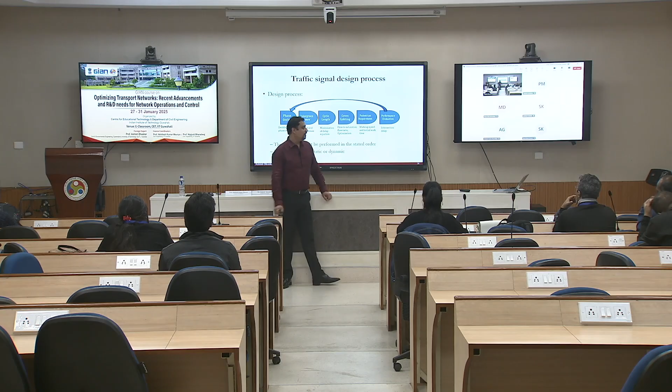Okay, so maybe what we should do is think of a hypothetical, ideal scenario. You have the data you need for the signal. You don't have side friction unnecessarily, so you're able to enforce things so that you don't have too much—like a rickshaw stopping at the intersection itself. You're able to clear that and have less side friction.

But obviously you cannot totally remove the heterogeneity out of it—you will have cars, bikes, and e-rickshaws there. So what I'm going to discuss now until the end of the first lecture: afterwards we will discuss under that hypothetical scenario what learnings we can get from overseas that can be applied, or what areas we should focus on as a researcher or practitioner if we have to adopt and implement that in Indian conditions. We can think of some imaginary scenario—but is it possible, if we're able to get rid of those issues through enforcement, can we still do something? So that's what we'll discuss now. Please keep this in mind.

I didn't plan for this, but since things didn't start out as expected, let me ask a question. Yesterday we started the discussion on traffic signals, and honestly I struggled to figure out what to present and what not to present. With VSL and ramp metering it was much easier because I know it's not taught in Indian conditions and you don't have much experience with that, so I went to the fundamentals, especially the fundamental diagram. With respect to signals, I know in the undergrad program you're taught how to design the signal, but I wanted to figure out what I could cover from the Australian experience to bring to the table so we can initiate this kind of discussion.

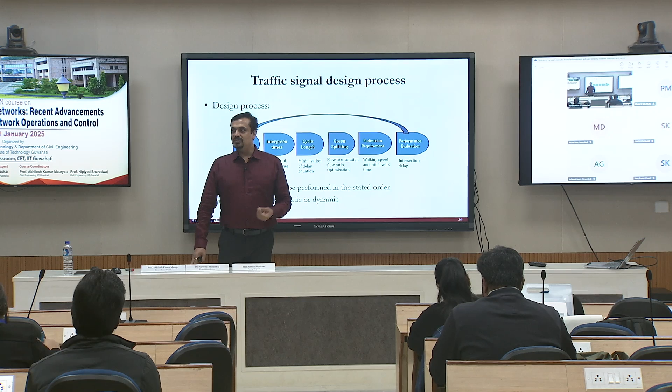That's the objective. We talked about the design process—there's one process where you talk about design, signal phases, maybe defining phases, and intergreen time: how much time you need for the transition from one phase to another, given the width of the road, the width or length of the vehicle, etc. We talked about cycle time—you can borrow an optimization equation from Webster or other means to get the cycle time you want. Also, specifications defined by your jurisdiction, like the Indian Standard Code, also have some specifications, with improvements made down the line. So each jurisdiction has its own requirements that an engineer must satisfy when designing a signal for that area. Then we talk about green splitting.

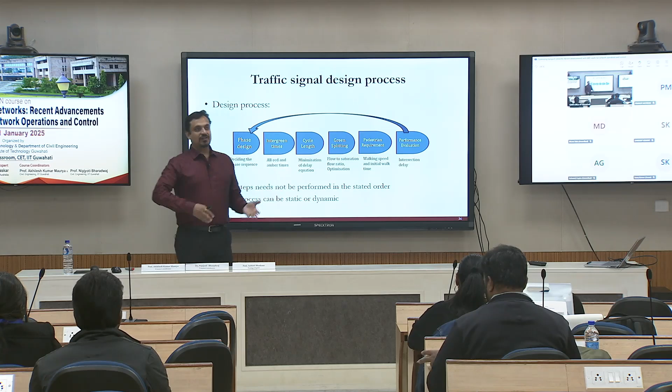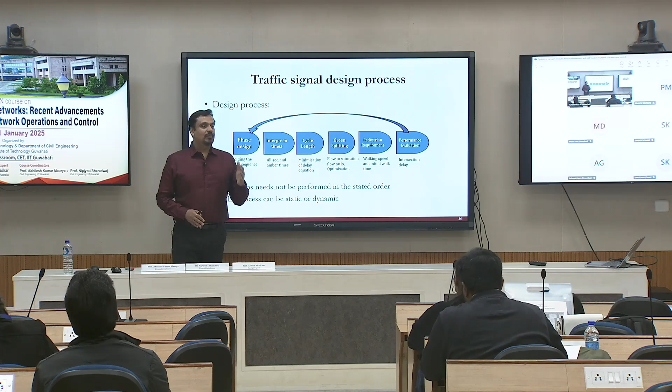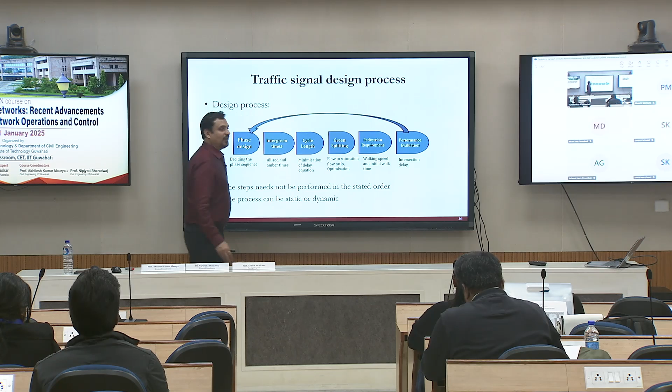A very simple approach: give green to the approach where you have more demand. You define the entire cycle, say pie, and the share of pie should go higher to the approach where there is more demand, with certain restrictions—you want some minimum green to serve pedestrians. Although I did not discuss pedestrians, each time you give an approach a green, a pedestrian minimum is specified as well. Then we talked about—we didn't discuss much—performance evaluation, but you evaluate the performance once you've designed the signal and keep fine-tuning it. That was the process we discussed yesterday.

Now today I am going to talk about phases, the first process. The phase, as you know, you have different movements. Basically you try to combine certain movements together to give the right of way to enter the intersection. That's what the phase is.

Signal phase is generally defined as the right of way in a cycle that is assigned to an independent traffic movement or combination of traffic movements. This must account for the lane use and the traffic volume as well as the opposite traffic volume. So basically safety plays an important role when you are designing the phase.

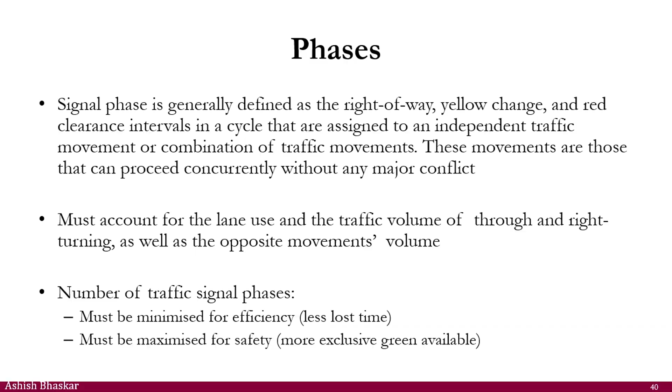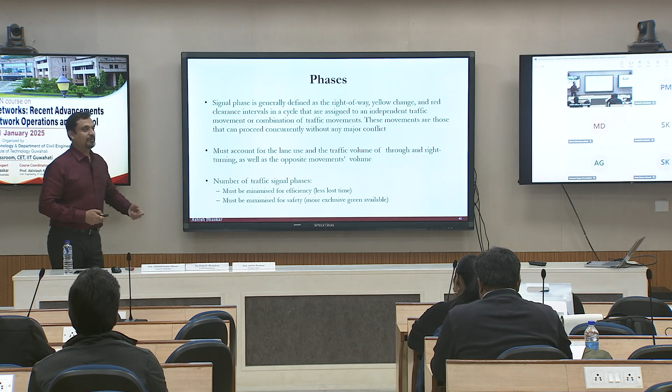We have also seen you do not want too many phases, because too many phases contribute to lost time, and that's not optimal. Also, you cannot have too few phases, then you will have an overlap happening, movements which can have an accident. So you want to avoid too much overlap from a safety perspective. There is a balance between efficiency and safety, and you as an engineer have to make a decision for that corridor.

There are different ways of defining the phases. Phase-based approach or stage-based approach is what I was discussing, that is one way of doing it. The other way is ring and barrier control. The third one is group-based control or movement-based control. It all depends on which country you are in and what they have followed.

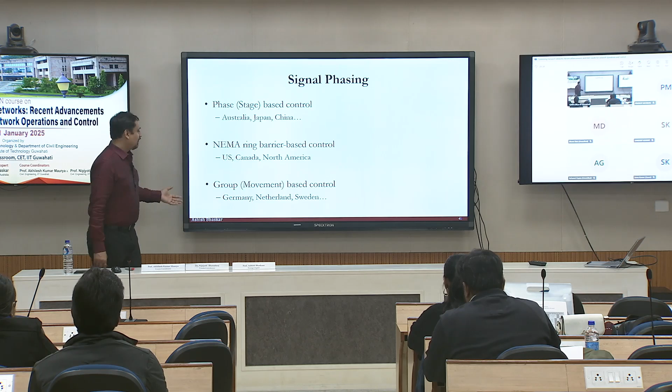US, Canada, North America follow the ring and barrier approach. Australia, Japan, China, UK, and I believe also India, we are following the phase-based control. Whereas if you go more to the European countries, they are following more of a group-based or movement-based control.

How many of you are aware of these three, the differences between them? Okay, so we'll discuss about what these three are. The first one we have already discussed.

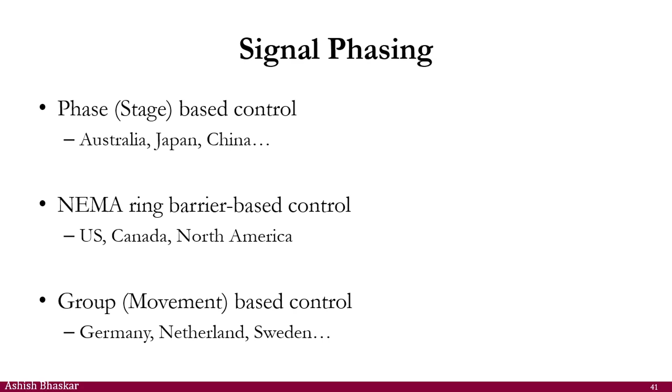We already talked about the first one yesterday, that you have an intersection and you define the phases. I have defined 4 phases. We can have 3, 2, whatever you want to specify. That depends on the geometry of the intersection, the demand profiles, and the past incident records on that intersection. That was straightforward, and at the end of the day, you might be displaying the green attached to the phase.

In the other case also, whether you go for the NEMA ring barrier or a group-based approach, you will have a display phase sequence. So let me talk about the NEMA ring barrier.

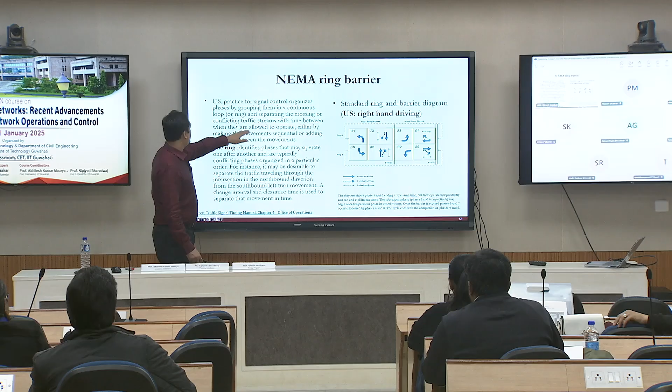This is from the US, so right hand driving is there, please keep that in mind, it's different from the way we drive here. In the US practice, they organize the phases by grouping them in a continuous loop, or a ring. So in this case you have 2 rings, the top ring and the bottom ring, think of them as 2 separate rings. They are separated by crossing or conflicting traffic streams, with time between when they are allowed to operate, either by making the movements sequential or adding a barrier between the movements.

So I have phase 1, phase 2, phase 3, phase 4. These phases you have to specify as an engineer, you will specify which phases you want. But if you look at a specific ring, the top one, none of these can go together. I will not let my left turner go with the other phase's left turner. They are right hand driving, so you might not be able to imagine it, but it's the same as our right turner going with the other movement's right turner, for example. So this is what you specify for the top one.

Then you have a barrier in between. What this barrier is saying is that these ones should never combine with the other ones. So let's say the left portion of my top ring should never combine with the right portion of the bottom ring, and vice versa. That's why you put a barrier here. Are you okay with this, ring and barrier?

But you can have a combination: 1 and 5 can be a combo, 1 and 6 can be a combo, 2 and 5 can be a combo, 2 and 6 can be a combo.

That's what the ring barrier is all about. It gives you more flexibility. In the previous case, once I have defined the phase, I don't have much flexibility. If I am defining the phase like this, we can adjust that also - we'll discuss that later. But here the phases are fixed, so in this case you're adding a bit more flexibility in the way you're operating.

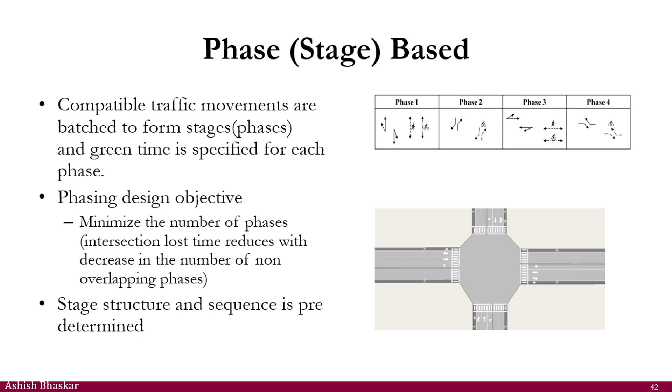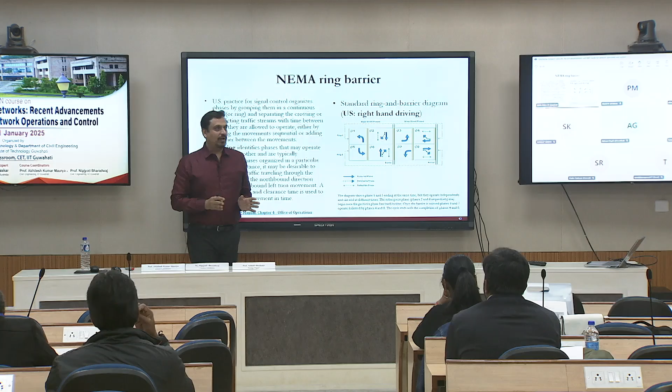In this case, you can see there are some protected phases and permissive phases. Protected means, if I'm taking a right turn, and I have a right signal, it means that is my priority to go - I can take a right turn. But if I do not have a right turn arrow and it is not red, just green for through, it means I can take a right turn provided the guy coming from the other side gives sufficient gap to make the turn. This is called a permissive phase.

So permissive phase is like, there is a through and a right movement. If this right movement is permissive, it means it will enter only when the other approach has sufficient gap for you to enter. So you're allowed to take a right turn provided there is sufficient gap in the other direction. You are allowing a somewhat risky behavior, because a right turn crossing a through movement can cause an accident. You allow that behavior because there isn't too much demand on the other approach, so there will be a safe gap for them to move.

So you can allow that. Basically, it's not that you will never allow a right turn across a through movement - you can allow it provided there is sufficient gap for it to be possible. If it's not possible, you won't do it - then you make it a protected phase. You understand the difference?

In fact, when you have no signals and you're trying to turn right, you're always in the permissive phase. In a case like India, you maybe believe you are always in the protected phase. But I hope you understand.

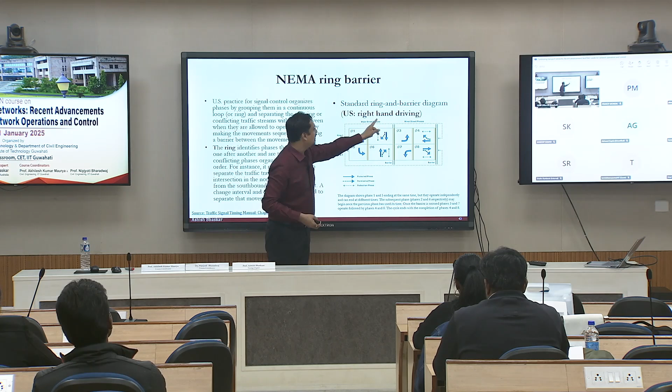So basically, the dotted line means this guy - since this is right-hand driving - is allowed to take a right turn provided there is a gap in this approach. Similarly, this guy is allowed to take a right turn provided there is a gap in that one.

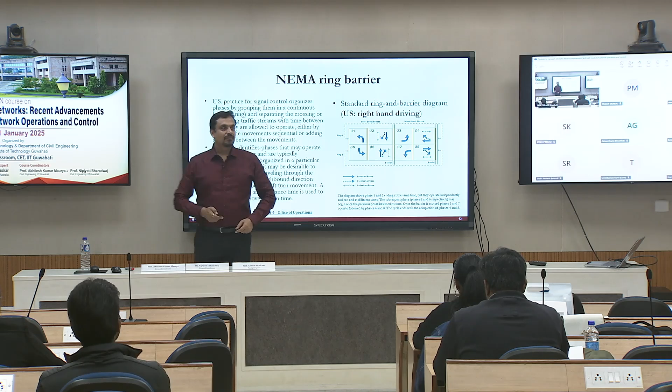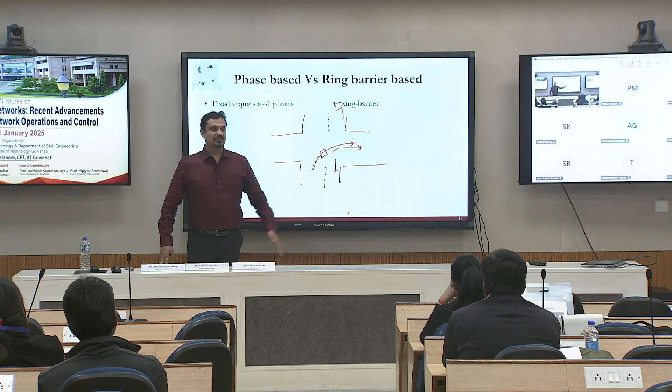Some other time of the day when you have high demand, you will not allow that. It's a decision you make as an engineer about that site, based on the demand profile. You need to understand the intersection geometry and the demand profile. Sometimes the intersection is too small, and you say no, it's unsafe, I can't allow that. There's a lot of engineering judgment applied. It's not one approach that can be applied blindly on all intersections, because almost all intersections are unique. You don't have the same intersection profile even in the same city.

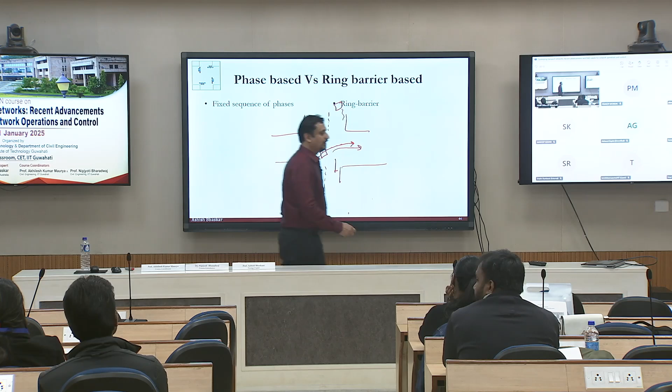I should rub this actually.

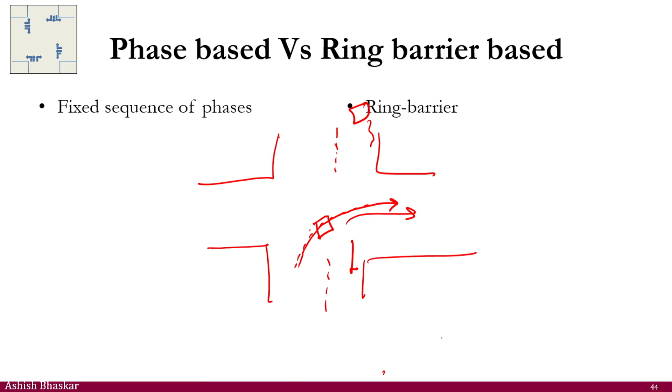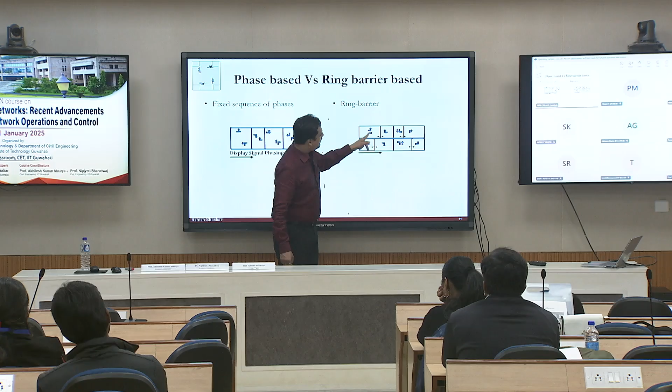Now let me show how ring and barrier gives you the benefit, more flexibility. Imagine this is a fixed phase sequence. Ring and barrier is, this portion is a barrier, and these can move. So let's say this is phase 1, phase 2, phase 3, phase 4, 5, 6, 7, 8. I give phase 1 that much green, but I can give this phase less green, and start the other phase. If I do that way, this is the combination I'm getting - this is my display signal phasing, meaning what you're putting on your signal lanterns. Or I can do the other way around, shift things, and get another combination. So you can have different combinations possible - that's the benefit.

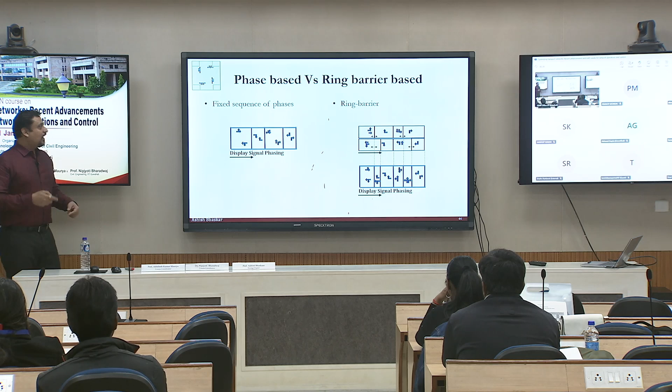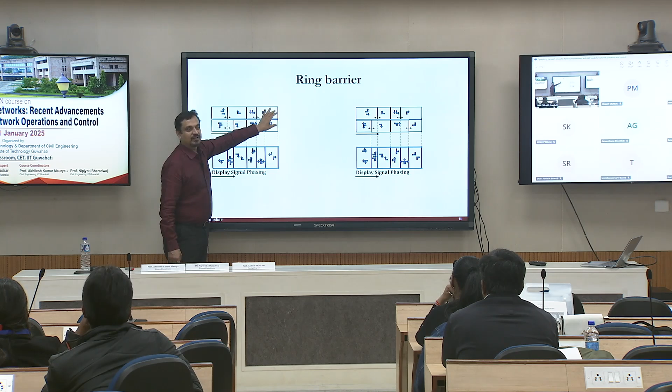Ring and barrier has slightly additional degree of freedom compared to the phase-based one. Let's say these are two conditions - one kind of display, there's another display. So here you have a through and left, and here you have a left and through, then you started your right phase, and then the combination of that one. But this was a barrier - this will never collaborate with that one. There's a solid barrier in between, and then you have this combination. So you start with these two phases in the beginning, but the duration depends on whatever demand is there. You end with those two phases, the cycle finishes, and you start again. That's a ring and barrier approach.

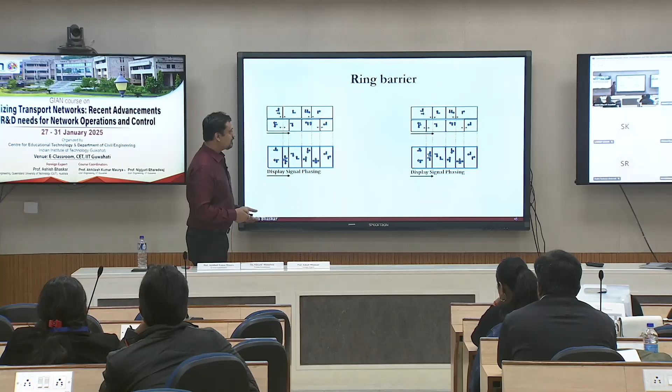It all depends on the controller you are using. NEMA controllers are designed that way, and this is how you design the phases for that condition.

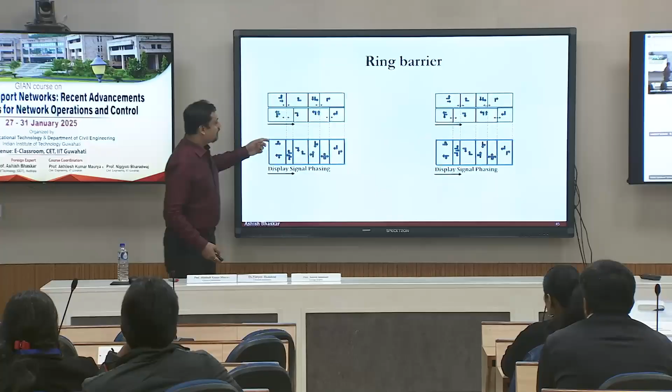Jump between the two means - what you're saying is, for example, in the first cycle I start here, I'm also starting there. Think of this as time - as time is moving, you use one combination from here, another from there, or one phase from here, another there. So I start with phase 1, I'm also starting phase 5. Let's say there's not much demand for phase 1, I can cut phase 1 early, then go to phase 2, but I can still continue phase 5 until I reach my barrier. The beauty is these two rings can work independent of each other, and that independence gives you that combination.

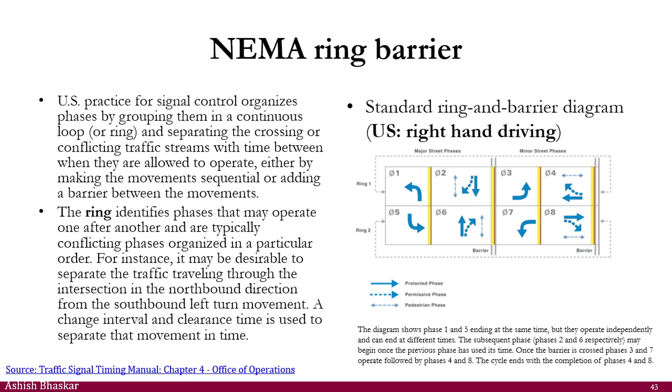Does number 2 and 5 have a conflict? No - in fact 2 and 5 doesn't have any conflict, because think of 2 as turning right, this one turning through, and this is the left turn of 2. So if you have 2 and 5 together, it means you are giving all three movements of that one to go.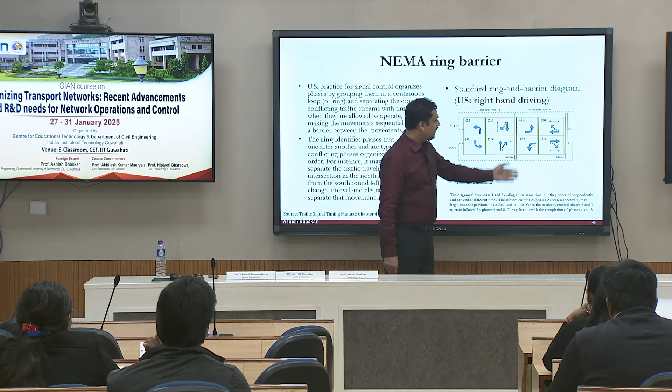You design it. In this example, they have used a permissive phase. You say, no, I don't want a permissive, I want a protected and I want a separate permissive. That's another phase you are specifying. So at the end of the day, you have to define the combination of the movements that defines the phase.

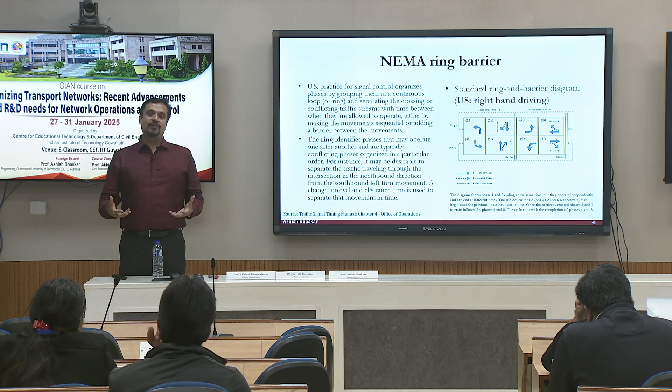So that is depending upon the number of lanes also, the demand. Because this one is designed for an intersection, for that intersection you have to understand the geometry first. What's the geometry of the intersection? Then what is the traffic composition for that one? Then for that traffic composition, you define what should be the phase sequence and all those things.

So that was for the ring and barrier. I borrowed this from one of the Eclipse slides from Sidra Solutions. Signal phasing sequence, when you're doing a phase based approach, you can combine different phases.

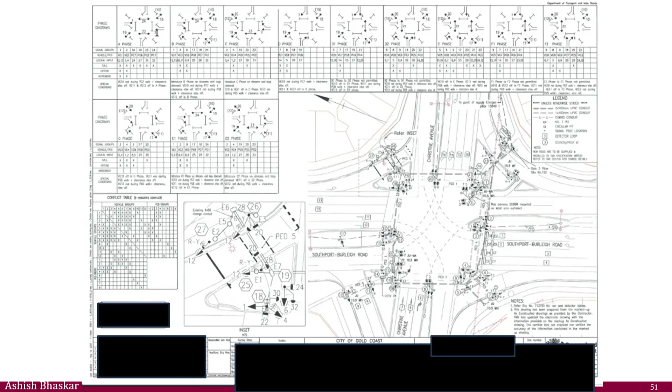That was for the phase group. Now I'm going to talk about a further degree of flexibility, which is the group based or movement based controller. There I don't care about phases. What I care about is, give me - I can group my movements together. Ultimately what you're doing is, in the previous case also, you might have grouped your movements to form a phase. I said, let the movement be whatever, let this be one movement, let that be another movement, let this one will be the third one. Let's have the movements like this, let's have them in the bag. Based on my need, I will just extract some of them and let them go. That's what this group base is doing.

But in this particular case, you have an intergreen matrix. So intergreen matrix says that if I am having a group K1, I'm finishing K1, I can start K2, but K3 should start 4 seconds after that. There should be a 4-second intergreen between K1 and K3. And in fact, we talked about the green time and all that - this is the one which is considering that. You have to design it for that intersection based on your geometry of the intersection, based on the speed limit of the road, based on the pedestrian speed and all those things. So that has to be designed for the intersection. So this is a lot of degree of freedom.

Why do we need that? When do we need that?

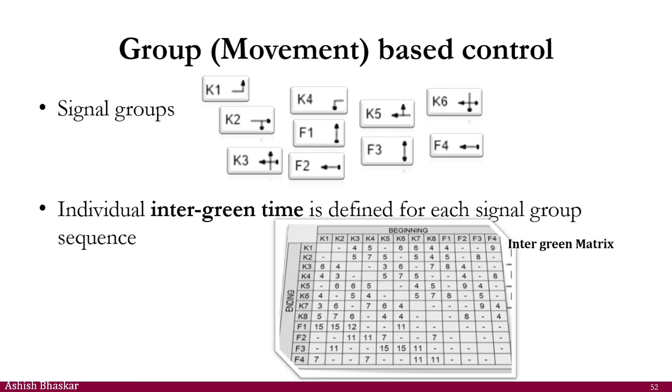But vehicles will arrive, whatever form they arrive in. If there is equal traffic in all approaches, this thing will end up same as the phase group, a very fixed phase group. See, if the traffic is equally coming from all the approaches, ultimately the optimal combination that you get from here will be similar to the phases that have been optimized, right? So yes, you might be picking them from a pool, but the optimal pool will be same as the optimal phase you have defined. It will not be a very big difference.

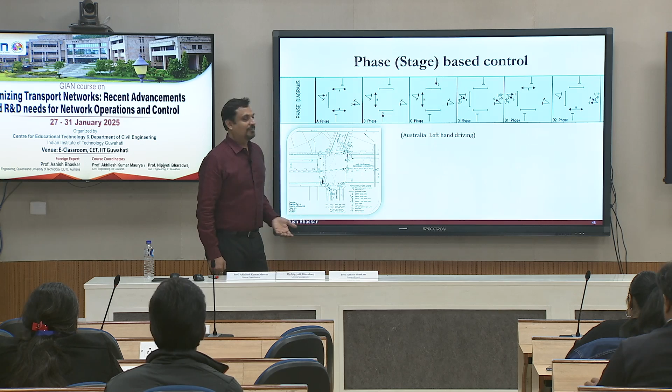In the previous cases we talked about flexibility. I started with the very fixed base approach, that's a fixed one. NEMA ring and barrier adds a layer of flexibility, but you still have to define these phases. You can have a different ring specified based on the requirement of the intersection, so you have an additional level of flexibility. The phase-based approach adds that flexibility too, but this one is saying I have a totally different level of flexibility. I am giving you full flexibility here.

We were making use of the time factor to design it. They do that based on what situation is required. What situation is this going to really add a benefit? When we have real time sensors. For the other ones also we need real time sensors? The fixed time control, when you do not make any dynamic changes, you don't need real time sensors.

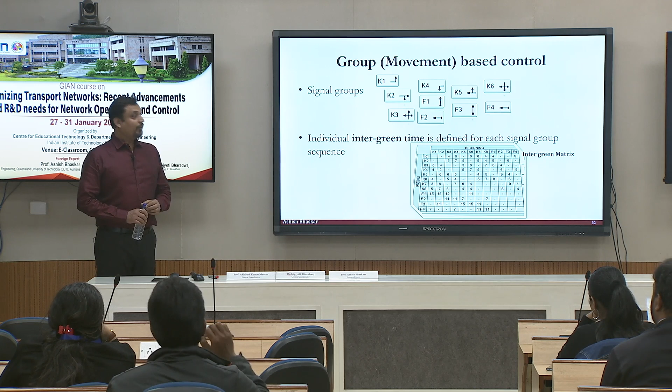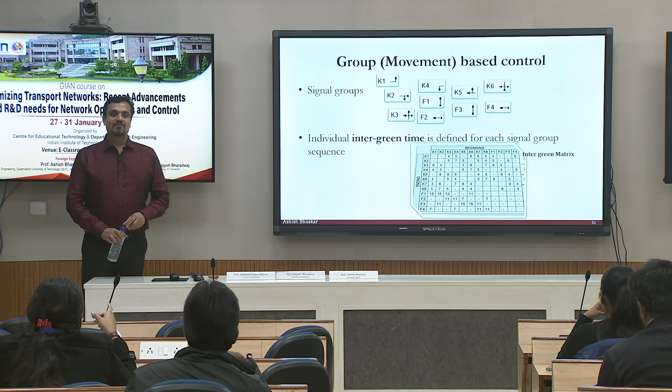But let's say all of them have real time sensors. This group-based control has been implemented, yes, it's in Europe. This is for intersections only, yes, all of them are intersections. I'm totally talking about intersections only. When we know that there will be fixed volume on fixed routes, we can do this. Yes, we can. But we can do the same for the other ones also.

Variability is so dynamic. Yes, when you have such dynamic variability, this is going to really make some benefit. I said this is in Europe. What's in Europe that is different from India or other places? Borders are open. Think of any Indian song, they are dancing in Switzerland, and you have trams and metros, all things going around. It's a multimodal situation, so much happening there. The benefit is when you have so many different combinations happening, a tram is coming, you want to give it priority, it becomes much easier to handle that way.

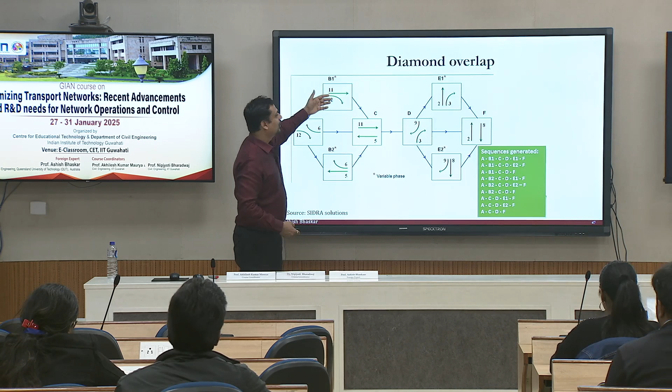This is a time when you need more flexibility. This is my personal view. You have the benefit literally when you have too many constraints. If you do not have that much constraint, the demand is equal from all the approaches, whether you use this approach or that approach, more or less all of them will be giving the same thing. There will not be a significant difference. The benefit is only here.

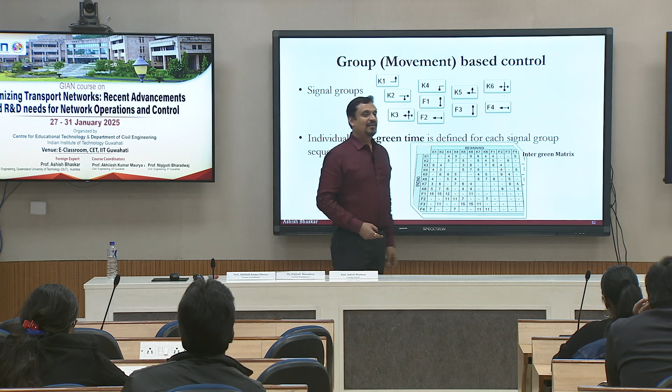The example that you're putting is still at the intersection. Intersection, yes, the tram, these are intersections. So you say, like, I've been in Europe, I can also see an intersection with bicycles, trams. Once you are implementing it, irrespective of whether you have bicycles or trams or not, you have the cars, you are implementing it, right? But I'm talking about when do you think will be the major benefit? Major benefit will be when you have variability in the demand coming from various approaches.

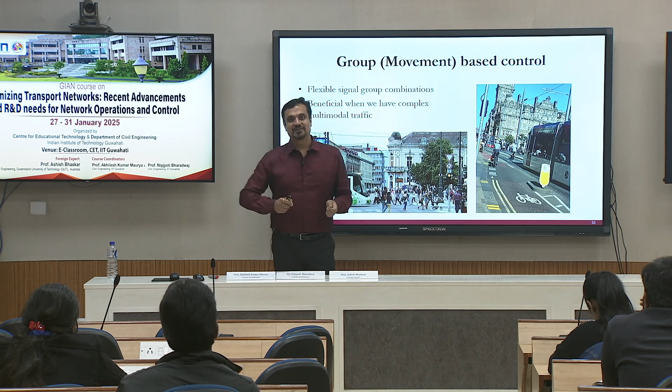Stochasticity is far higher. If you have fixed things, they will follow a certain order, and you will have some lost time. Here you don't follow any order, but it's at a certain cost. What is that cost? You don't follow any order, so what will happen? You will just select whatever is the highest demand, you think you will select it.

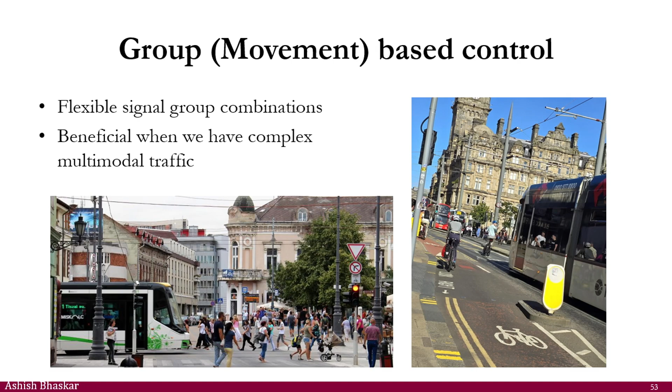In fact, in this case, the lost time is less because the way you select them, you are overlapping as much as possible. When you are overlapping, I will give you an example, then you will have understanding. One of my PhD students is working on this topic. Initially I was thinking not to talk about it, but yesterday I did a lot of massaging on my slides to figure out what to present, what not to present. So I will just give you one example, give me one second.

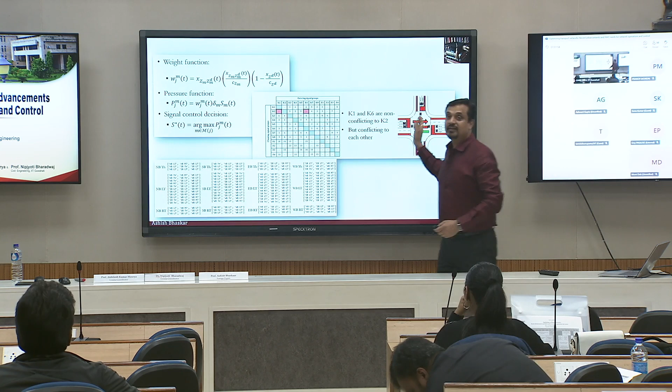This is an example from one of my PhD students' work. He is working on a traffic signal control algorithm based on the max pressure algorithm.

This idea is borrowed from internet communication concepts. Think of an intersection with different approaches. Max pressure says the one having the highest pressure gets green. You make this decision every certain time interval, deciding whom to select — the one with the highest pressure is selected.

The pressure can be specified in various forms. You can define pressure in terms of queue length, in terms of delay, or in other ways.

As I discuss this, I'll show you the contribution he has made. He did a literature review to identify various studies where max pressure has been used and what pressure function they used. The pressure function is simply the sum of the weights of the various movements, and these weights are specified using certain combinations, generally queue length and so on.

He tried to modify that. He studied this and came up with his own equation that takes into account the amount of spare capacity downstream. For example, if I give green to an approach but the downstream doesn't have enough capacity to accommodate that traffic, I don't want to give too much green to it even if there's a lot of pressure here. It takes such factors into account.

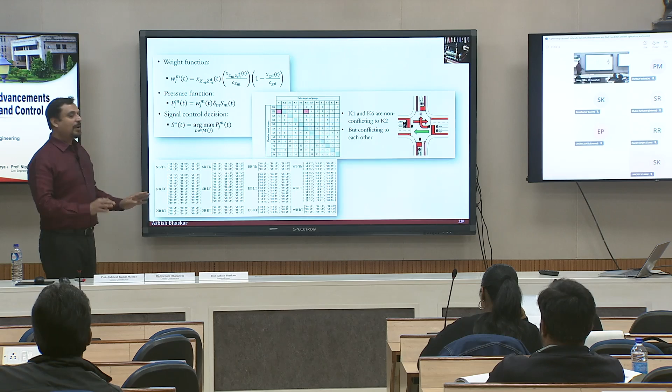You have different combinations of groups — let's say northbound left, northbound right. Northbound means the movement going in the north direction, left, right, or through. That's the naming convention. Northbound through is compatible with left, right, and left. So basically you have this intergreen matrix, which tells you that K1 goes with K1, K2, K5, F1, F3, and so on.

So what he said was: at any given time, figure out which movement has the higher pressure, and select that one as the primary movement to give green to. Let's say northbound through or northbound left is selected. Northbound left is compatible with northbound through, northbound right, westbound left, and so on — a number of movements it's compatible with.

He said, I'm going to go to the next level of addition — I'll check how much pressure exists for the other compatible movements, and the one having the highest among this sequence is what gets selected. That's how he makes his decision. You have total flexibility in how you select it. This combination could be northbound left with southbound left, eastbound left, and eastbound right.

After a while, the queue length changes, and perhaps southbound through now has higher pressure than southbound left, so you select whichever has higher pressure next. You can have any combination happening, but the good thing is that when moving from one combination to another, there's a good overlap, so you're able to serve more traffic in the same time interval.

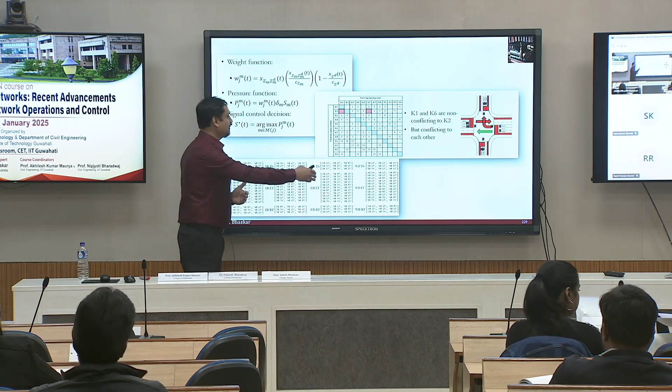So the closer I am to 1, it means that I'm about to spill over, so I'm going to give more weightage to this. The other one is if I'm going from this intersection to the next intersection. For example, if I'm going from here to there, if the queue is already until this point and your spare capacity is very small, I don't have to give too much green immediately here because I have to flush that first. This is what happens whenever there is a spillover. You might be giving green to an approach, but if you do not look what's downstream, that is a total spillover, that's a waste of green. You don't want to waste the green.

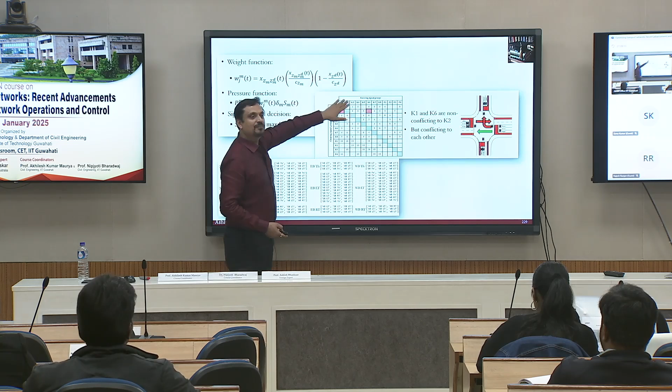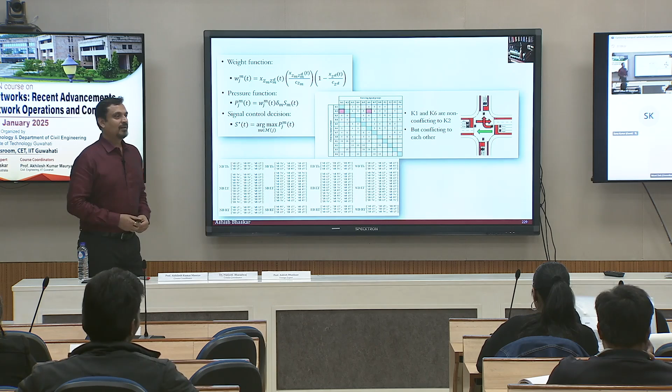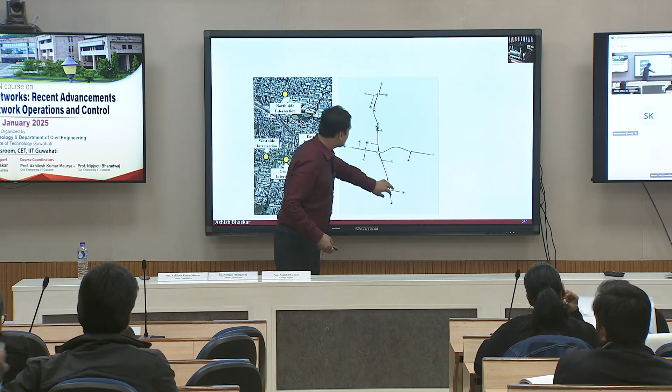So he just tried to come up with this function here, that if this thing approaches 1, this whole thing goes to 0, your weight goes to 0. You don't want to give a priority on that one. Or you can have this one, like for example, the model he has developed is named Pascal. You can run Pascal here, you can run Pascal there, you can run Pascal everywhere. I mean, you are individually running them, and they take into account whatever information you have. But here the big assumption is I know the queue length. That assumption has been made for the research purpose. For practical implementation, you need to come up with an estimate of the queue length.

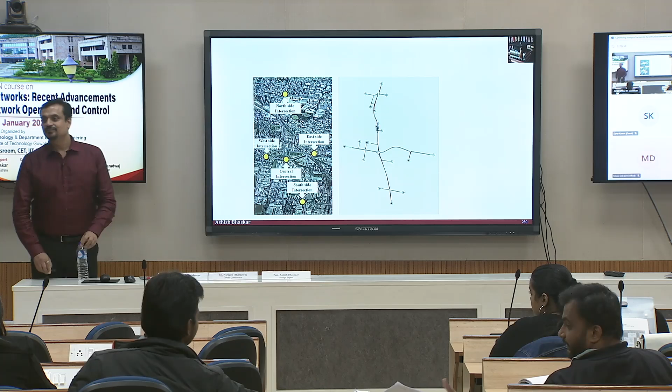So, will it be difficult for coordination? Like, because the flexibility is more, is it better to do for isolation?

Yes, in one sense, these are quite decentralized, but they are only focusing on one of them at a time. But in the case of max pressure, it has gained interest a lot in the last couple of years. You can see from the literature, the number of papers started in 2012, almost in the last 12-13 years, how many publications are there in that space, right? And his publication hopefully is going to come soon, the next one will be here, right? So you can see there's a lot of interest in that one.

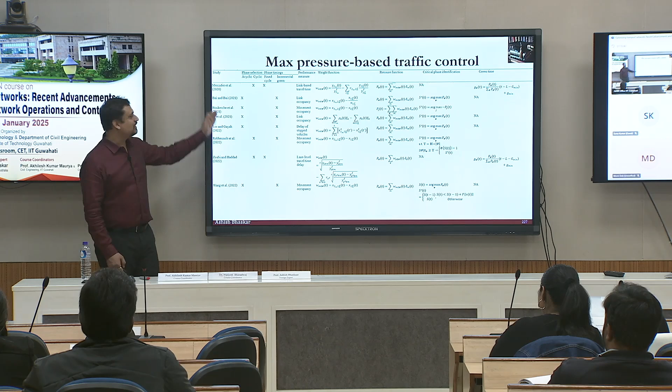I know one of my colleagues in Israel, Professor Jack Haddad, he mentioned to me, I met with him recently, that they have even implemented max pressure in one of the intersections there.

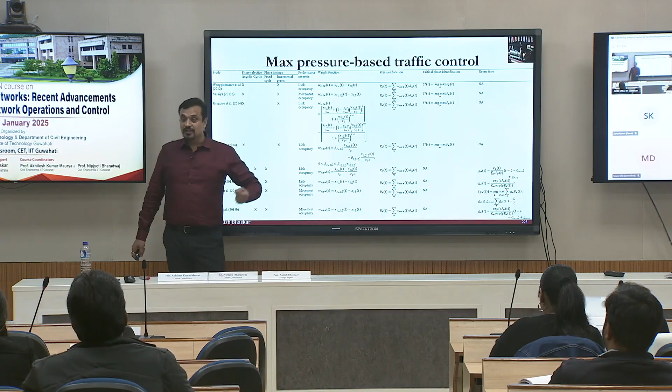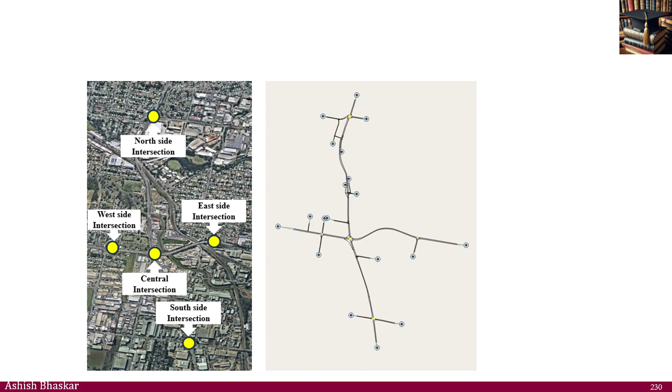Based on the pressure function they have defined from travel time. Now coming back to coordination, you can always think of it this way: for coordination, first these intersections should talk to each other, meaning you should have a centralized approach.

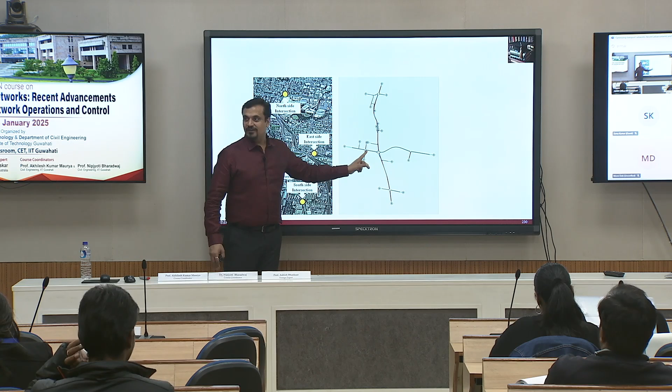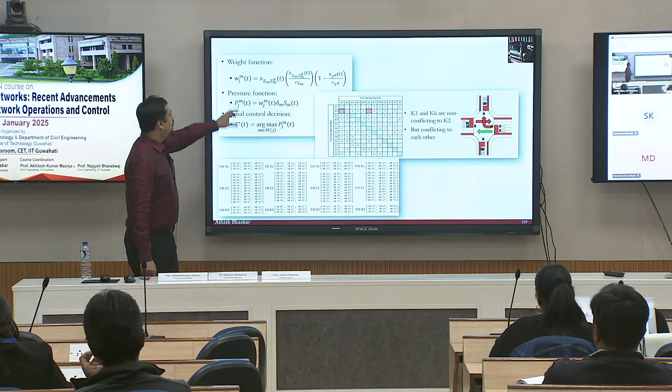There's one approach where you say, okay, if the green is given here, I know how long it might take to reach there. I might give extra weightage to the downstream one for coordination. At the end of the day, your lever in hand is just the weight function.

That's one way. The other way people have done is a totally decentralized one, where we combine them based on the travel time of that approach. We don't need to talk, but we know that green was offered, so this green should be offered after a certain time. You can add some intelligence to get the coordination.

In fact, it has been done. In Europe, the public transport priority system is already there. The trams, when they are going to hit the intersection, have to be given green. Those add-ons you can add easily, like the pedestrian push button.

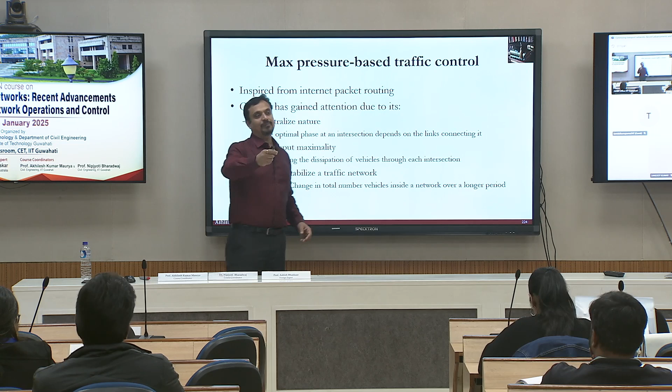It is a call. I will show you when I show you the TMR system. The pedestrians are making a call, so the controller knows that now there is a pedestrian. That is the only way the controller knows there is a pedestrian, from the push.

There are other sensors too, like pedestrian sensors, radar sensors installed at smart pedestrian crossings that can tell you there is a pedestrian. But apart from that, push buttons are the most widely available way to know there is a call for pedestrian. It doesn't tell you how many pedestrians are there, just that somebody has made a call.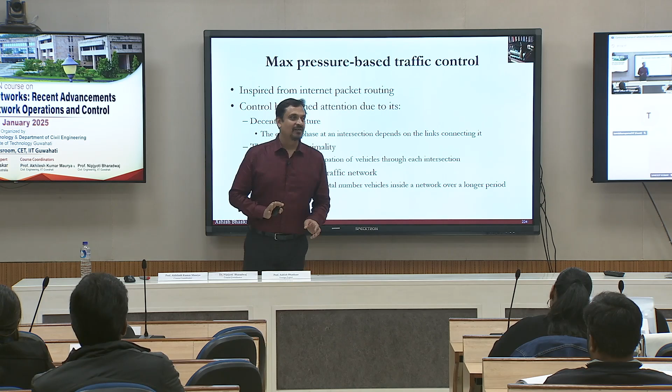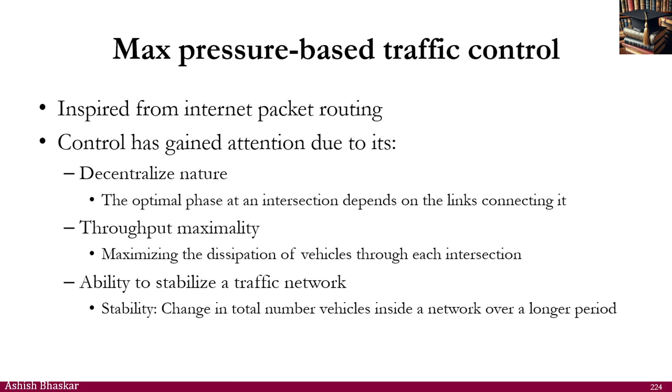So I hope that answers your question, that it can take any combination. I was having a chat long ago with Professor Lelitha Vanajakshi about this. She is the co-supervisor for the student, a joint PhD with IIT Madras, named Tamajit Ghosh. We are working together.

We were having a chat, and her view was that in Indian conditions, both of our views are that it is hard because people want predictability. It will be more unsafe if we do that way for Indian conditions. I should not speak on her behalf, but we agree on that.

So where was I? Yes, it's about the culture too, but more important is when the phases are not predictable, people might be more prone to take risks. There's research, I know in Japan and also in China, comparing these two from a behavior perspective. They didn't find any significant variation; people basically adapt to it.

And in fact, if their delays are minimized, they are happy. People will take more risky behavior when they have to stop for 10 minutes - you will hardly care, as you mentioned, about breaking the rule in that case. But if you're stopped briefly and know you'll quickly be allowed, you are happy, like with the congestion delay.

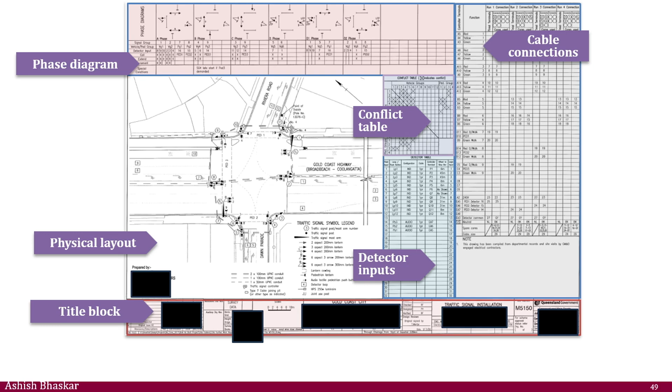That will be there, and that's why when designing your phases, you have to consider the behavior in mind. For example, let's say through and right - I might like to combine them together. In Indian conditions, you'd say, okay, let everybody go when I'm giving a green. So you might define your phases considering the driver behavior of that area in mind. That's where you have to apply your engineering judgment.

Okay, we can have maybe 2 minutes break before we start. Yeah, just stretch your body.

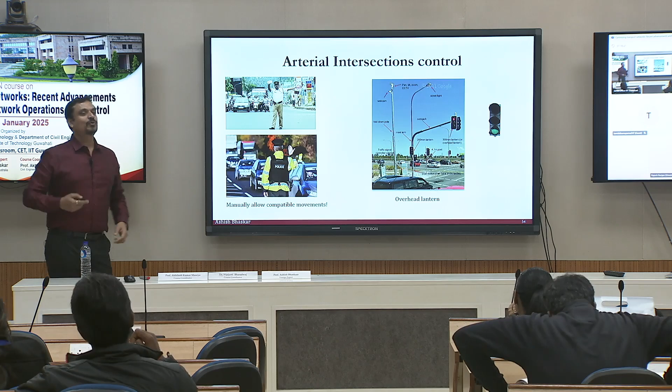We can start next. The next topic I'm going to talk about is control systems, and I'm going to talk about streams arterial. Online audience, do you have any questions?

What was the question I asked in the morning? It was about pedestrian all red. The question I was asking in the morning was, during this discussion, think about applying traffic signals in Indian conditions under a certain hypothetical scenario. You have all the data with you, don't worry about the data set. There is no side friction happening at the intersection. You have enforced sufficiently so that you are not letting people stop unnecessarily, but you do have heterogeneity in the traffic. So how will you design the traffic signal for Indian conditions?

That's the question I asked you to think about, and perhaps by the time we finish this discussion, we should finish by getting your views on how it should be designed based on the learning or the things we are specifying. We've already discussed roughly group based, phase based, movement based, and barrier based systems. Perhaps we will not go with the movement based system for Indian conditions, because it is so random that it will be unsafe.

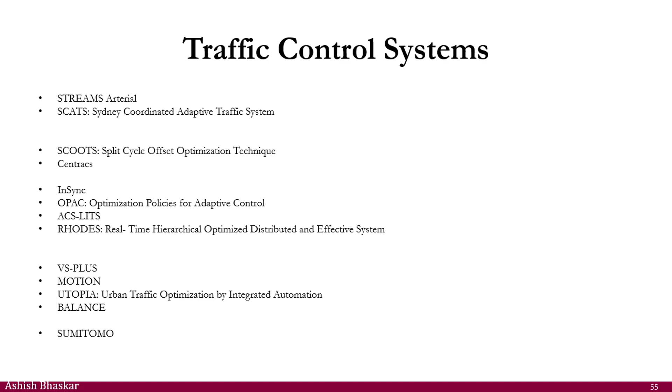Just some of the list of tools. These are the actual systems that can help you control the intersection by observing the traffic using sensors, and most of them use a loop detector or a proxy for the loop. When I say proxy for the loop, I mean they might be using cameras. The camera focuses on a specific location on the intersection or after the stop line, wherever they need to focus. They make a virtual loop and detect the presence, so they're not taking full advantage of getting the queue length and other things.

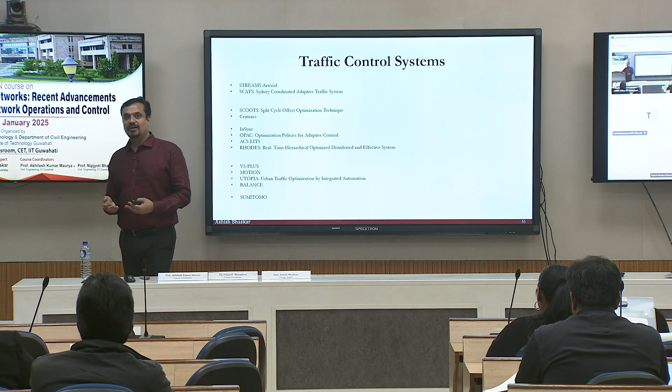Although I talked about how our max pressure algorithm requires queue length, we don't actually know how to measure queue length, we are assuming queue length will be known to us. So the sensors at this stage are loop based, or presence based, is what they are using for traffic signal control.

So I'm going to talk about one of the legacy systems. Basically, on the current state of practice, I'm going to talk about streams.

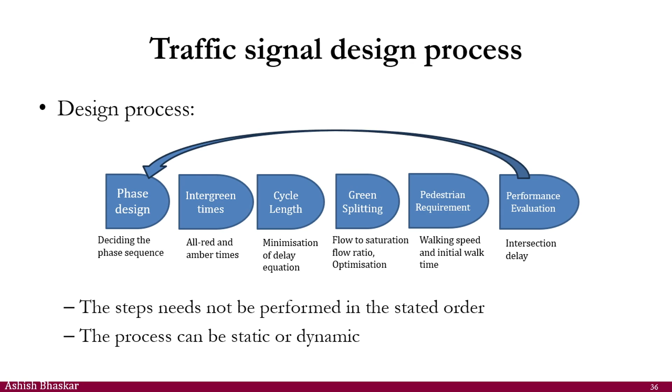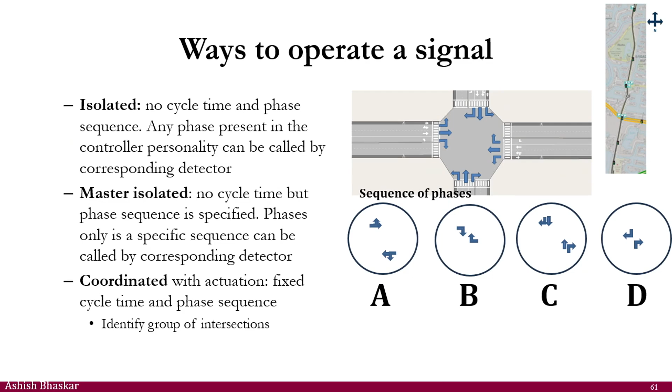We can stop here, but I would like you to think about two questions which we will discuss and answer later on. You have seen that you need to perform a spatial grouping, which is the groups you have to form with respect to coordination, what corridors to actually coordinate. You might say I will coordinate only this much, or I will coordinate these or those. You also need to define your schedule, what time of day you're going to do what kind of schedule. So basically you have to identify both spatial and temporal boundaries for your signal design, and generally they are based on practitioner survey and practitioner experience, how much they know about the site and the survey that they do for the site.

We have discussed a lot about the dataset, Bluetooth, loops, trajectories. Can you think that data analytics can really help us come up with a systematic procedure to identify these boundaries? Just think about it, we will have a chat later on.

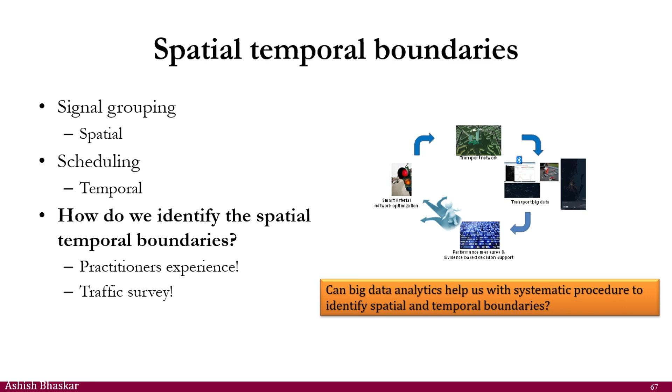I think it's time for a break before we start something else. Can we take a break or continue? Check if the tea is there. We can take a break here.

Yes, there's a question. What is the price of loop detector or image processor?

I know the pricing, I will show you one slide later on where we have done a comparative analysis. We did a whole-of-life comparison, not exactly modeling the whole-of-life cost, but comparing different sensing technologies. Loops are relatively much cheaper compared to cameras with respect to whole of life, because camera technology itself is cheap, no doubt, but the software upgrades and such things change quite frequently. The whole of life is not 20 years for cameras, whereas a loop can have 20 years of life. After 5 years the software will change, so there's a lot of cost involved in data processing and software upgrades. So they are comparable, I would say, but if you look at the whole of life, loops are still cheaper -- that's what practitioners have told me.

But again, it depends. For Indian conditions, I think camera should be a good way to go, the cost variation isn't that huge. Loops can fail quite frequently if the road is not properly maintained, because loops need a cut on the road, and if for whatever reason the road isn't properly maintained, your loop might not function properly. Whereas a camera is a non-intrusive technology, you put it overhead or to the side, and you can perhaps manage it more easily. But cost-wise, I would say they are pretty much the same.

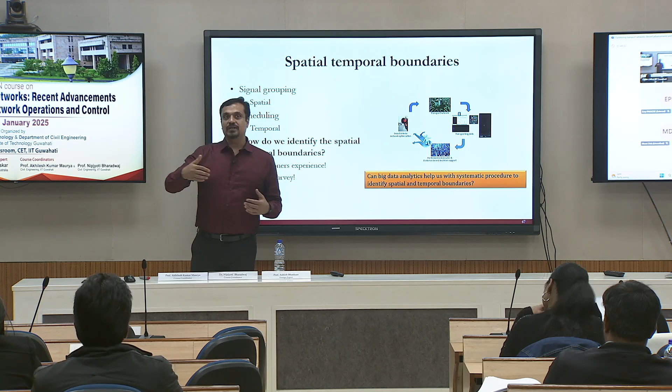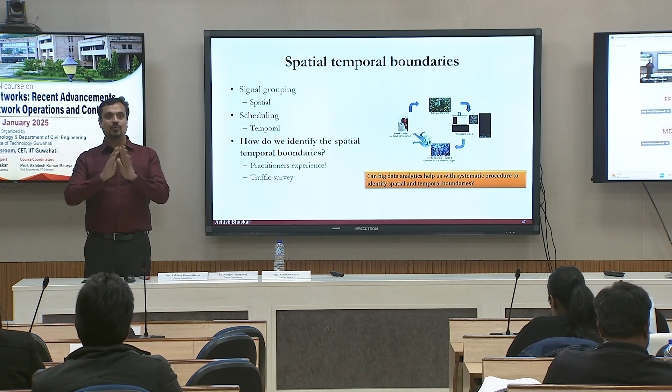If some approaches have low demand and you're giving excess green to them, you can take the green from that and give it to another approach. That's what you can do, and that's what I will discuss later -- you try to come up with different data analytics to understand that there is some room for improvement. But if the system is oversaturated, you can't do much.